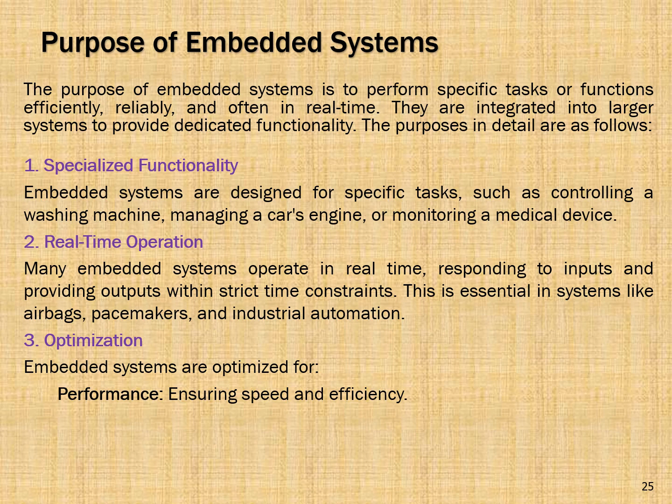Embedded systems are optimized for performance so that it ensures speed and efficiency, and they should have compact size so that it fits within constrained space, and their power consumption should be as low as possible because most of them are battery powered.

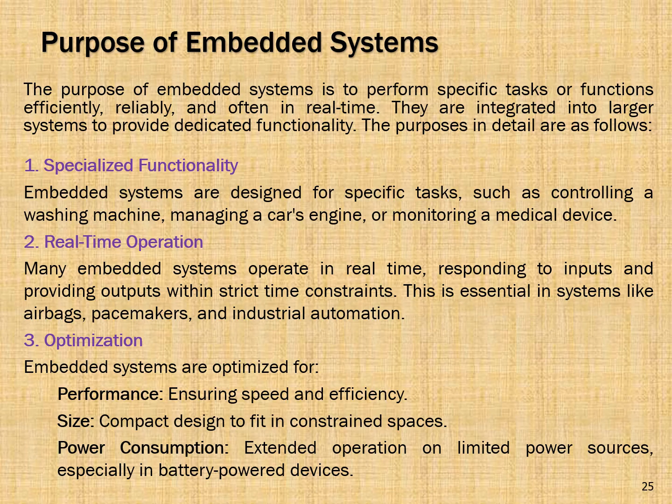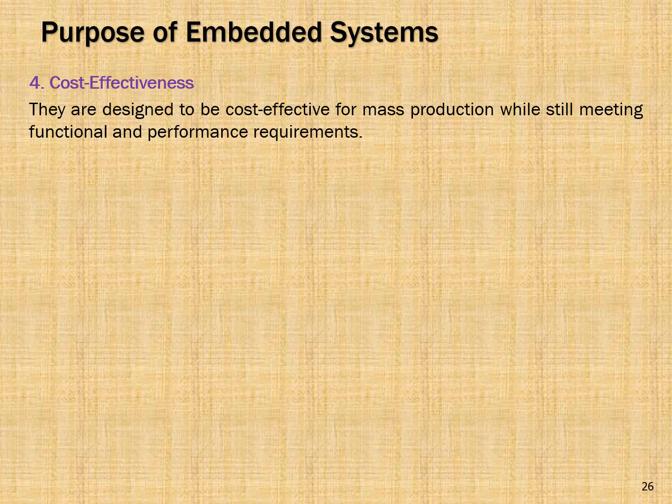They should have cost effectiveness, so their design should use a lesser number of resources, and they should be optimized for meeting the functional requirements as well as the performance requirements.

In automation and control, it should enable automation by controlling processes without human intervention. Some examples include home automation systems, robotics, and smart appliances.

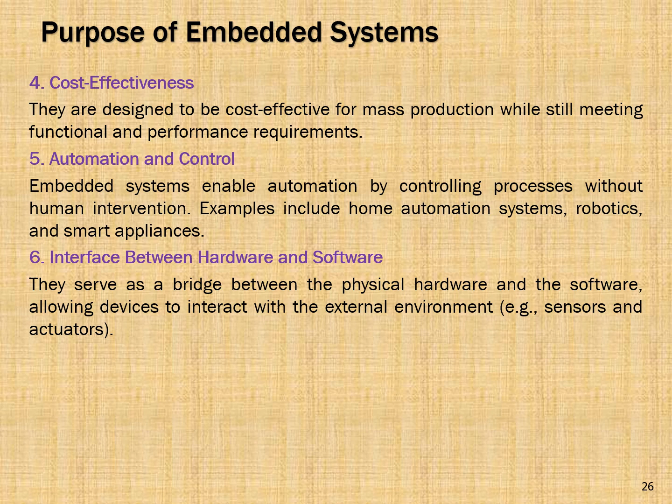It should be interfacing between hardware and software. They serve as a bridge between the physical hardware and the software, allowing devices to interact with the external environment, such as sensors, actuators, etc.

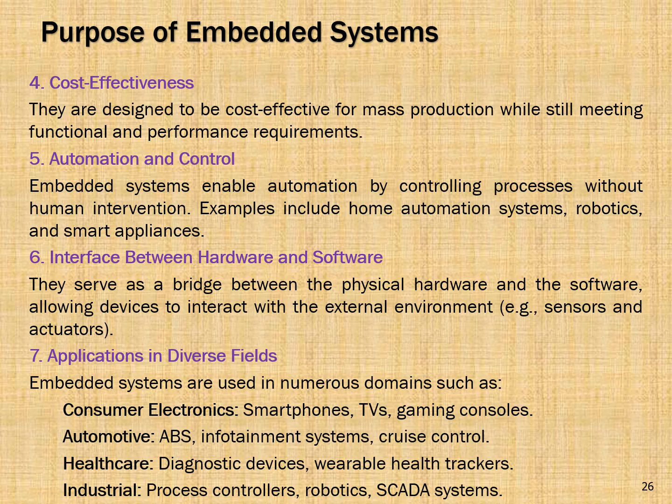Their applications are diverse across fields like consumer electronics, automotive, healthcare, industrial process, and so on.

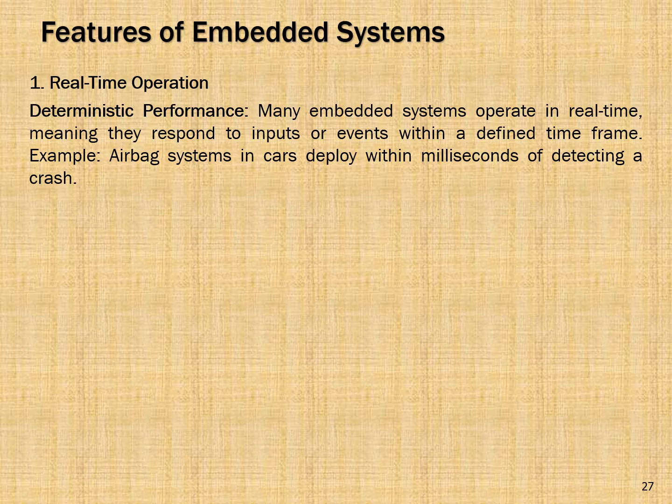If we talk about features of embedded systems, one important feature is real-time operation, or deterministic performance. Many embedded systems operate in real time, meaning they respond to inputs or events within a defined time frame. Example: the airbag system in a car deploys within milliseconds of detecting a crash.

They are single function: they perform one task or a small set of related tasks repeatedly. For example, a digital camera.

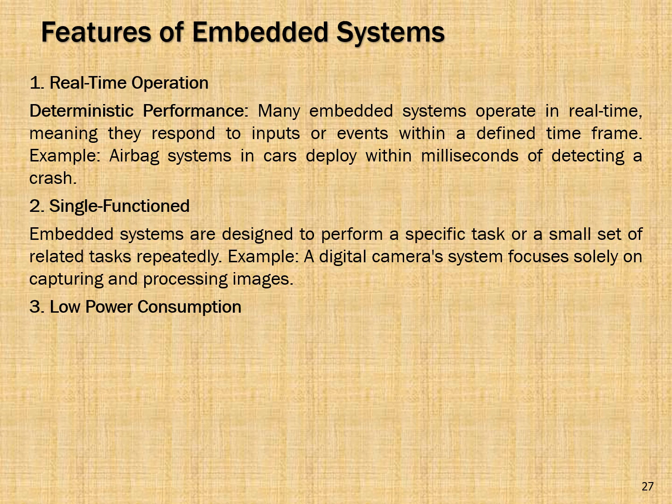Low power consumption is another important feature of embedded systems. They are mostly battery powered, so they should consume a very small amount of energy so that the time between charging can be elongated, and they should have a compact size so that it can fit within the appliances.

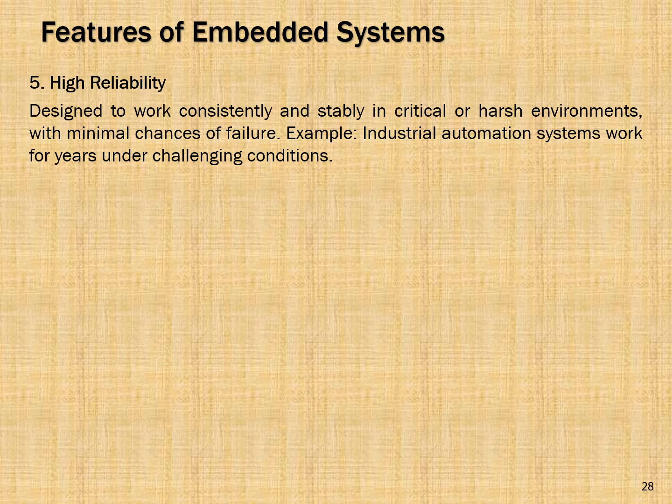It should be highly reliable. It is designed to work consistently and stably in critical and harsh environments with minimal chances of failure. Example: an industrial automation system works for years under challenging conditions.

Hardware software integration: embedded systems tightly couple hardware and software to optimize performance and functionality. Example: the firmware in a microwave oven directly controls the hardware to manage the heating function.

Limited user interface: many embedded systems have a simpler or no user interface. For those with a user interface, it is minimal and specific to the task. For example, washing machines often have a simple UI with buttons or knobs.

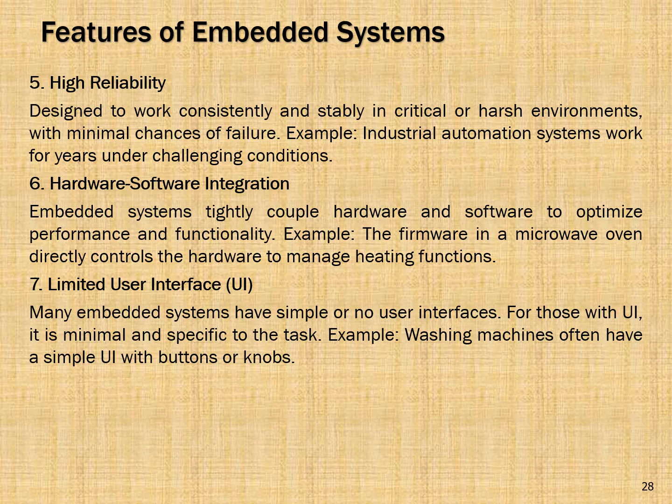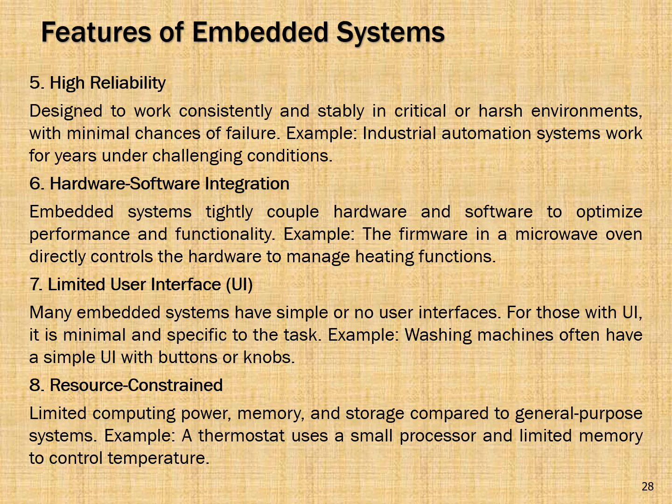Resource constraints: limited computing power, memory, and storage compared to general purpose systems. Example: a thermostat uses a small processor and limited memory to control the temperature. This means the resources are very much optimized in order to reduce the cost.

Some more features include being application specific. Every embedded system is developed for certain applications; for example, automotive systems like ABS are specifically designed to enhance vehicle safety.

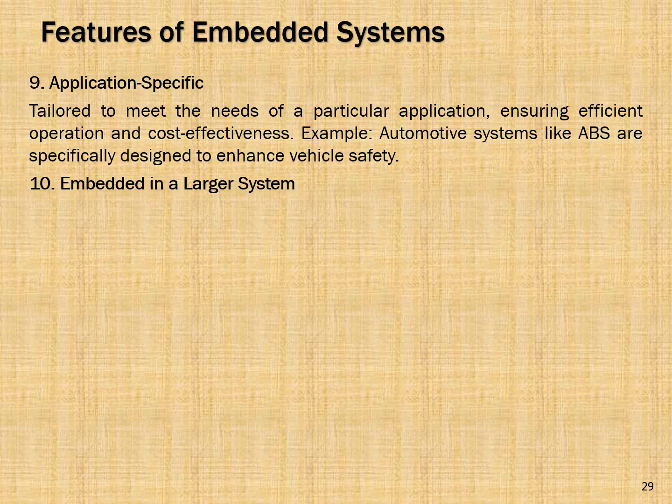Embedded in larger systems: often a subsystem within a larger device, contributing to its overall functionality. Example: a microcontroller in a smartphone handles tasks like touch input processing, etc.

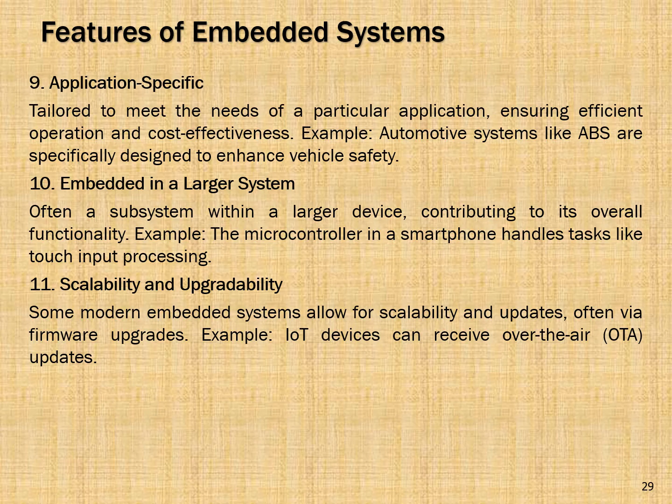Scalability and upgradability: some modern embedded systems allow for scalability and updates, often via firmware upgrades. Example: IoT devices can receive over-the-air updates.

They should be low cost, designed to be cost effective, especially for mass production. Example: simple embedded systems like digital clocks are affordable and widely available.

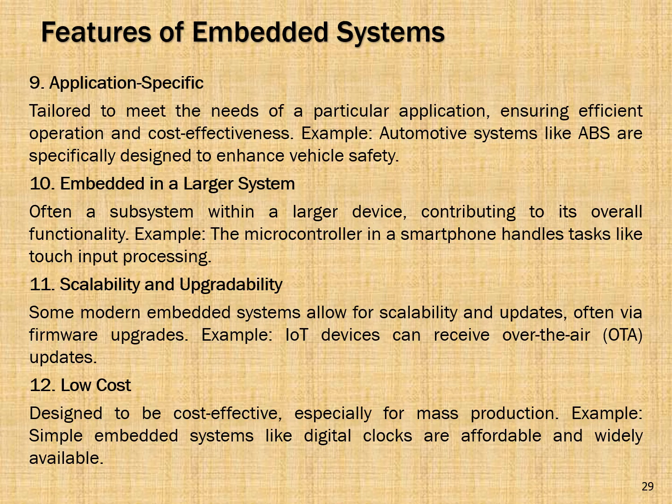With this, we come to the end of module 1. So here are certain questions related to module 1, which you can go through and prepare answers against these questions, which is given as an...